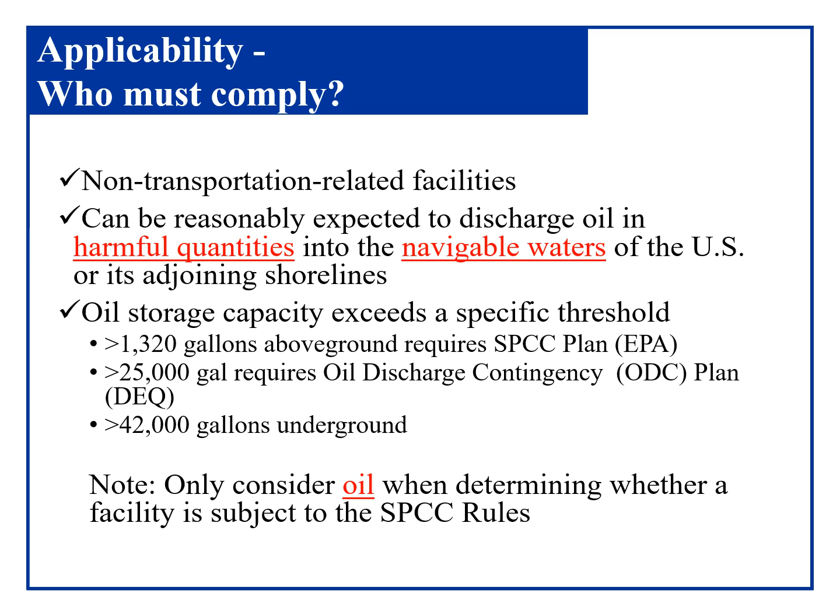You may be wondering what kinds of oil are covered under SPCC regulations. EPA defines oil as any kind of oil, including but not limited to petroleum, which includes oil mixed with wastes, vegetable and animal oils, seed oil, mineral oils, and others.

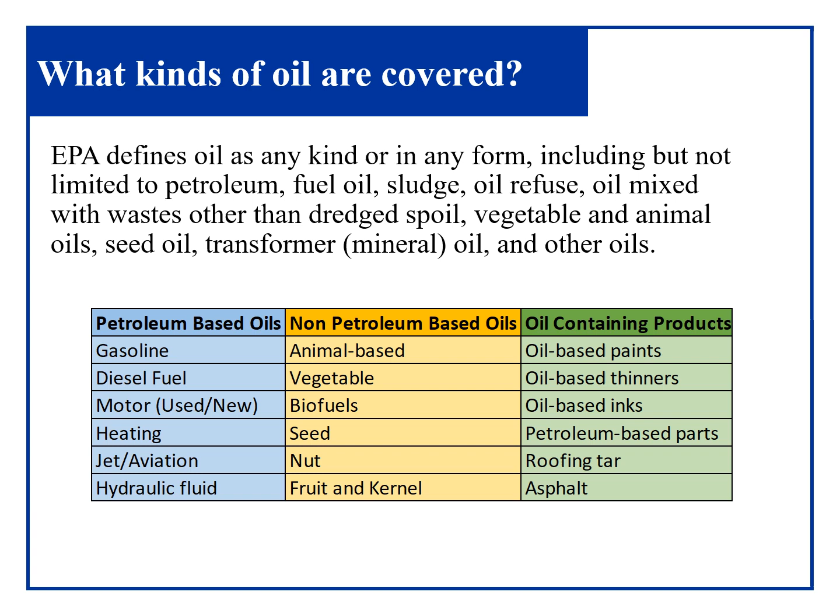As previously stated, in order to be subject to the SPCC rules, your facility must have the ability to discharge a harmful quantity of oil to a navigable water of the U.S. But what does EPA define as a harmful quantity? Unfortunately, it is not a quantitative number. EPA states that any amount of oil that would cause a sheen on the surface of the water or shoreline, or cause a sludge or emulsion to be deposited on the shoreline or beneath the surface, is considered a harmful quantity.

Navigable waters is defined by EPA as the waters of the United States or adjoining shorelines, including all surface waters like streams, wetlands, lakes, natural ponds, and rivers. At Central State Hospital, your flow pathway to a navigable water would be the following. Cattail Run and Rohoic Creek both drain to the Appomattox River. The Appomattox River then discharges to the James River, which eventually empties into the Chesapeake Bay. So Central State Hospital is within the Chesapeake Bay watershed.

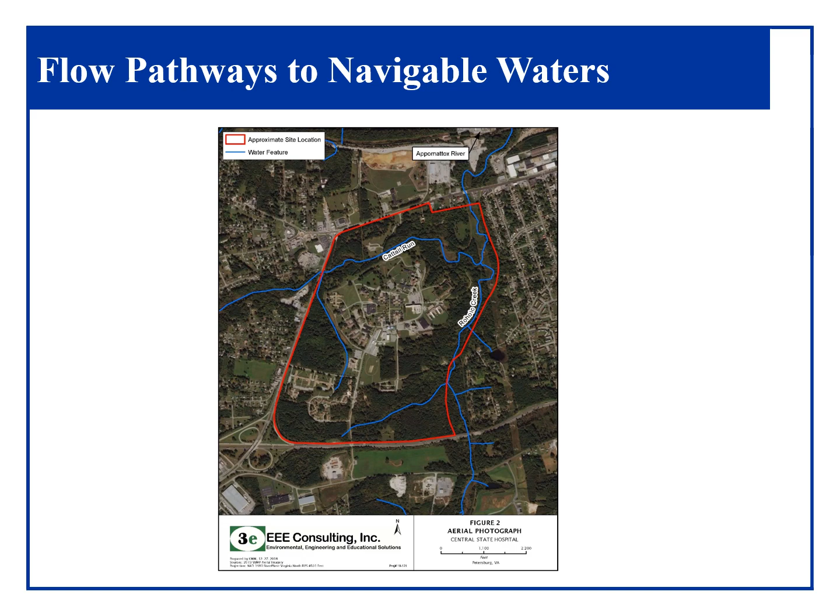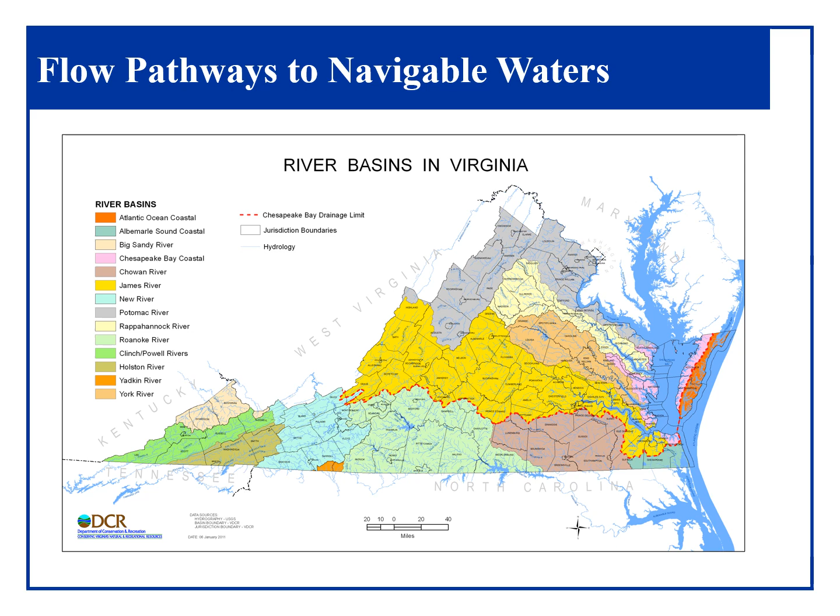This slide illustrates the major river basins in Virginia. As you can see, the James River Basin is in bright yellow in the center of the map. So why does your facility need an SPCC plan? Currently, Central State Hospital has approximately 20 above-ground storage tanks for fuel, most of which are for emergency generators. They range in size from 100 gallons all the way up to 80,000 gallons.

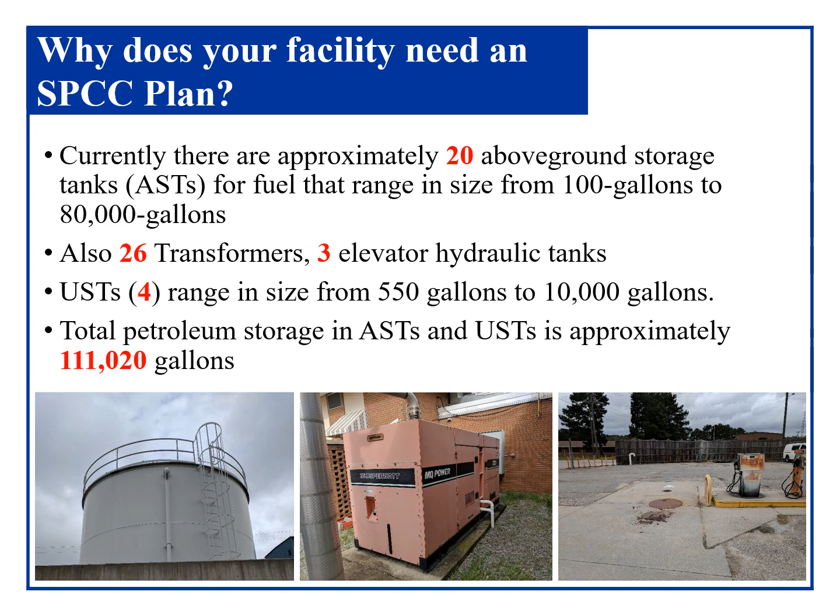Central State also has 26 transformers, 3 elevator hydraulic tanks, and 4 underground storage tanks ranging in size from 550 to 10,000 gallons. The total petroleum storage in above ground and underground tanks is approximately 111,000 gallons.

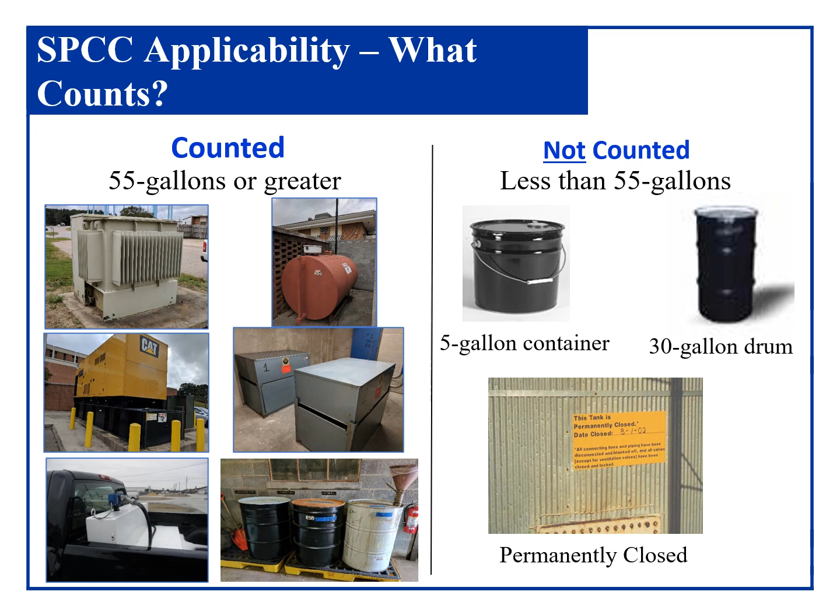SPCC regulations only cover containers that can hold 55 gallons or greater of oil. Things like transformers, portable truck tanks, 55-gallon drums, elevator hydraulic tanks, if any of these has the potential to hold 55 gallons or greater, regardless of how much oil is actually contained in the container at any given time. Which means if you have a 100-gallon tank, but you only ever put 20 gallons of oil in it, it still counts as a 100-gallon tank per SPCC regulations. SPCC regulations are not applicable to any containers less than 55 gallons or permanently closed containers.

As we just stated, the SPCC rules exempt any oil storage container that is permanently closed. In order to be considered permanently closed, all liquid and sludge must be removed from the container, all connecting lines and piping must be disconnected, all valves, except for the vents, must be closed and locked, and there must be a sign located in a conspicuous location stating that the tank is permanently closed with a date of closure. Closed tanks can be brought back into service at any time as long as they meet all SPCC requirements.

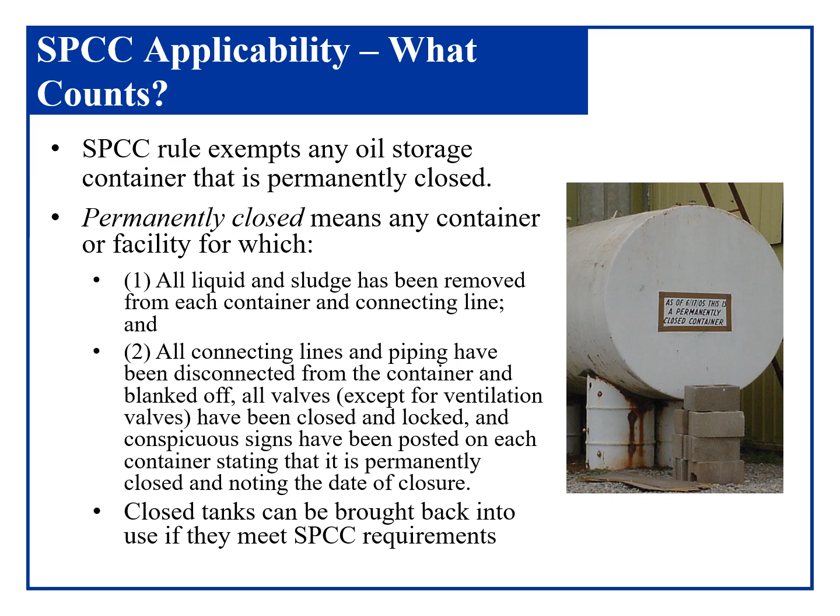It is important to note that your facility's SPCC plan must be reviewed and amended under the following situations. Whenever there is a change in facility design, construction, operation, or maintenance that would affect the facility's potential to discharge oil. If the facility gets a new tank, if you move a tank, or if there's major construction that would change the spill flow from a tank, all of those situations would require an amendment and a professional engineer stamp. If you do not have any changes, the plan must be at least reviewed every 5 years from the date of the original certification.

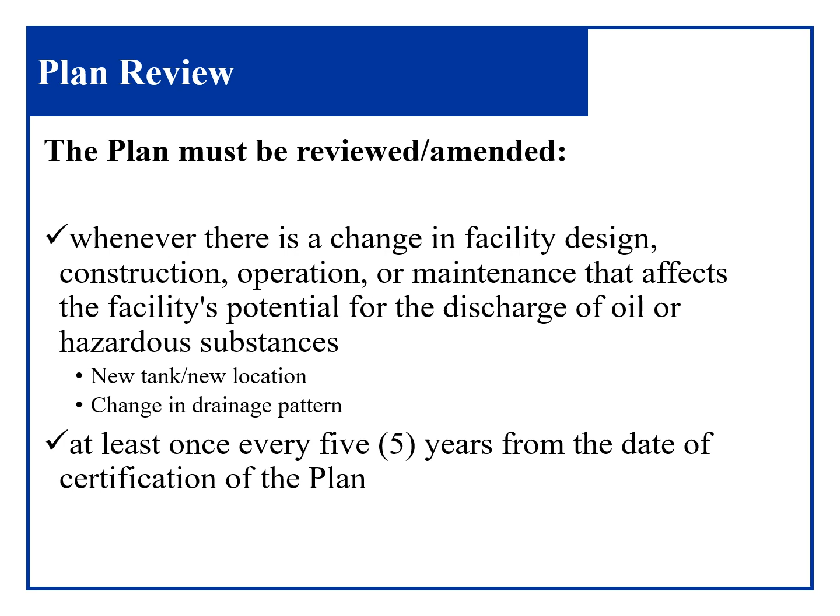Now we will take a short little quiz to go over some of the things we have discussed so far. What does SPCC stand for?

SPCC stands for Spill Prevention, Control, and Countermeasure. Are quart containers of oil covered under the SPCC plan? No. Only containers 55 gallons and over are regulated by SPCC. Who must be trained in SPCC requirements? All personnel who regularly handle oil products.

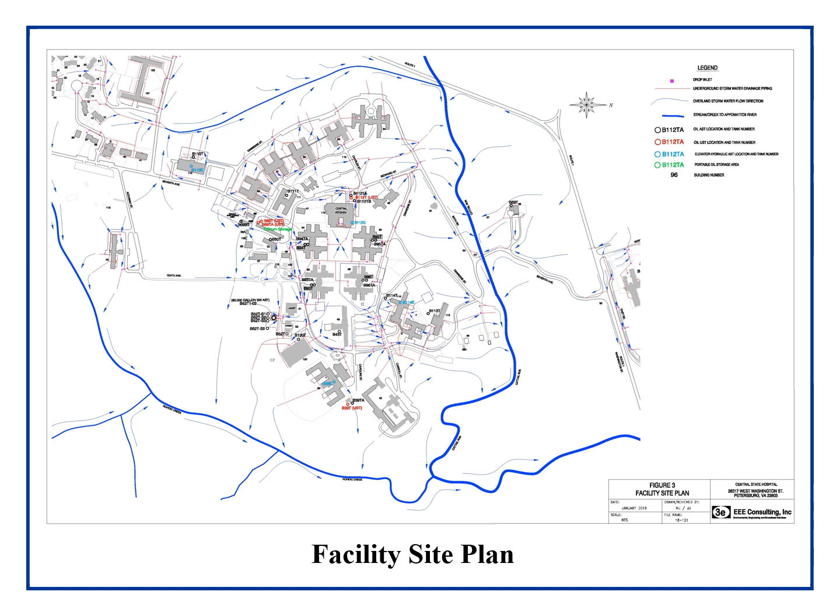Some of the important elements of the integrated contingency plan are security, discharge prevention, spill containment, flow pathways, countermeasures, response procedures, reporting requirements, and record keeping.

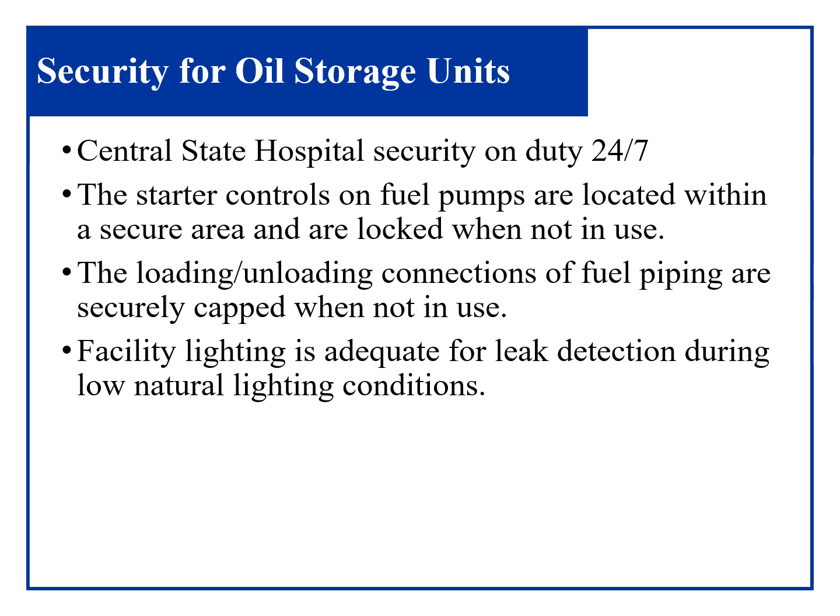Central State Hospital security is on duty 24 hours, 7 days a week. The starter controls on the fuel pumps are located within a secure area and should be locked when not in use. The loading and unloading connections of fuel piping should be securely capped when not in use. And facility lighting should be adequate for leak detection during low natural lighting conditions.

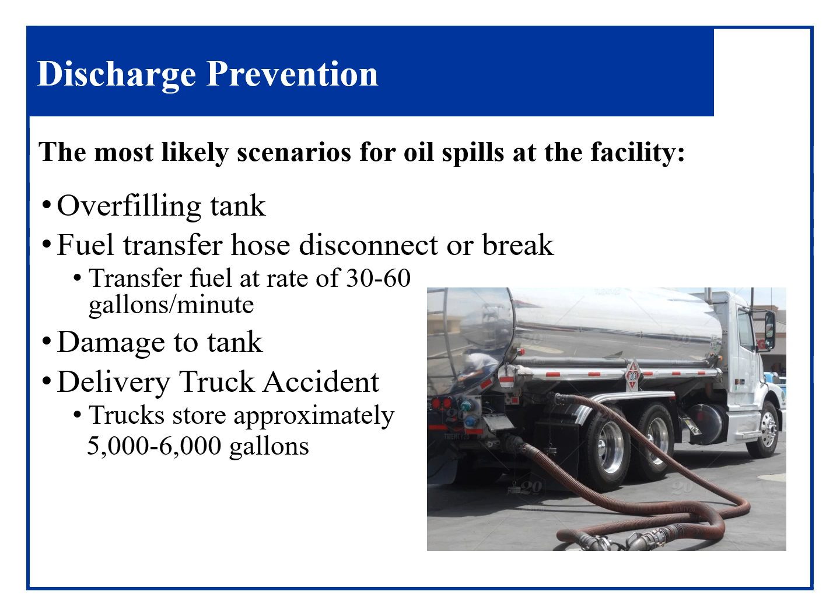Now we will take a few slides and discuss discharge prevention and how we can prevent spills at the facility. The most likely scenarios for oil spills are the following: overfilling the tank, fuel transfer hose disconnect or break, damage to the tank, or even a delivery truck accident.

How can we prevent overfilling a tank? It's very important to accompany the vendor during routine transfers, especially if the driver or contractor is new and has not delivered oil to the facility previously. Make sure you verify the volume of the product that the tank can accept before you offload.

Some facilities also have what's called an automatic tank gauge system. Other tanks may have an audible high-level alarm, which means an alarm will sound when they are filled over a certain amount. Tanks also have what's called an overfill protection valve, which will shut off flow to the tank when they are filled to 90 or 95% full.

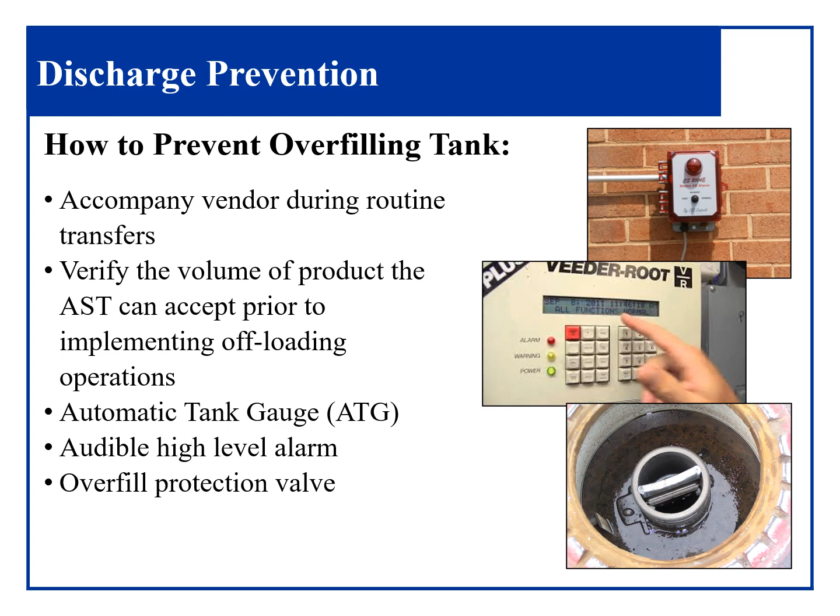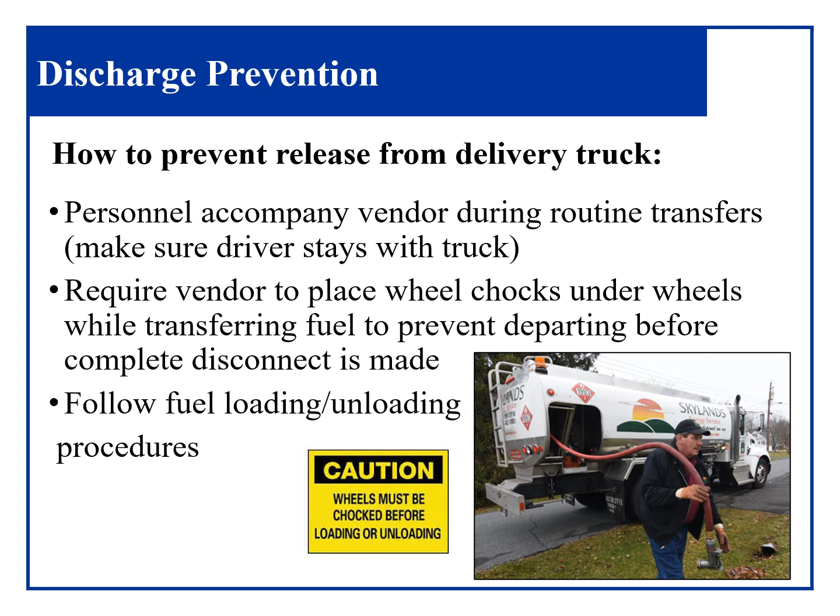How can we prevent release from the delivery truck itself? Again, make sure personnel accompany the vendor during routine transfers. Make sure the driver stays with the truck. Ensure that the vendor places wheel chocks under the wheels while transferring to prevent departing. And make sure you follow all fuel loading and unloading procedures.

How can we prevent release from the tank? It is very important that personnel inspect the tanks to ensure that they meet all SPCC and ODC requirements. Above ground storage tanks and containers must be inspected daily, weekly, monthly, and annually for signs of leakage and deterioration, and these records must be kept for 5 years.

Most above ground tanks at the facility are double walled, which means they have a primary storage tank surrounded by a secondary tank with an interstitial space that can capture any leaks from the primary tank. Underground storage tanks have an electronic leak detection system, which means any product in that interstitial space will trigger an alarm.

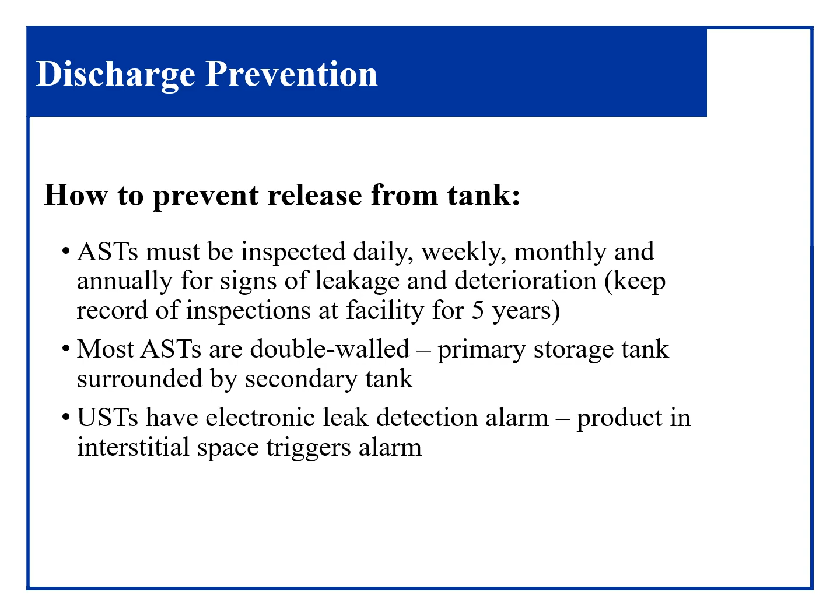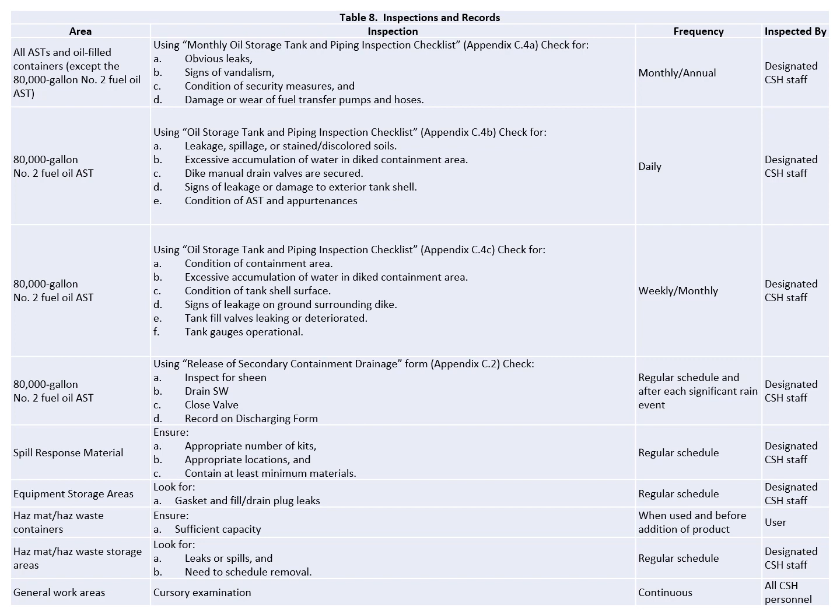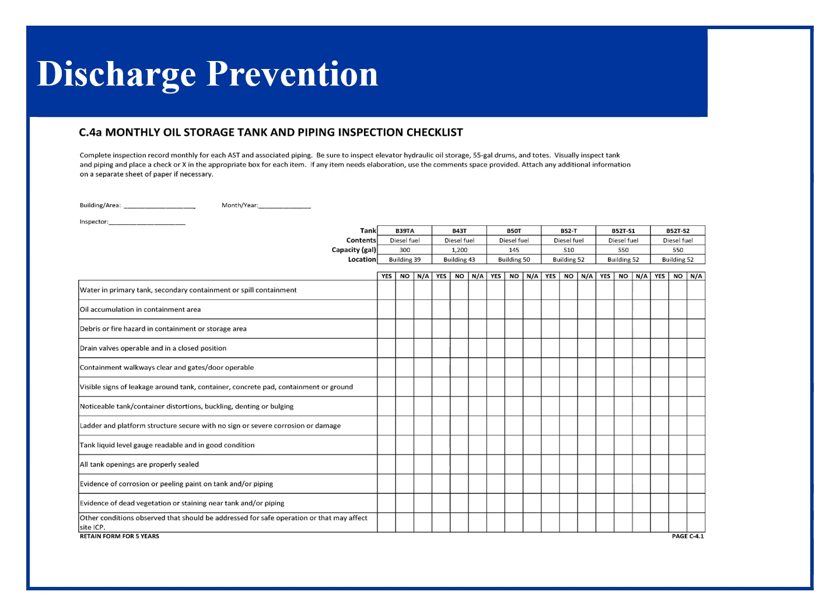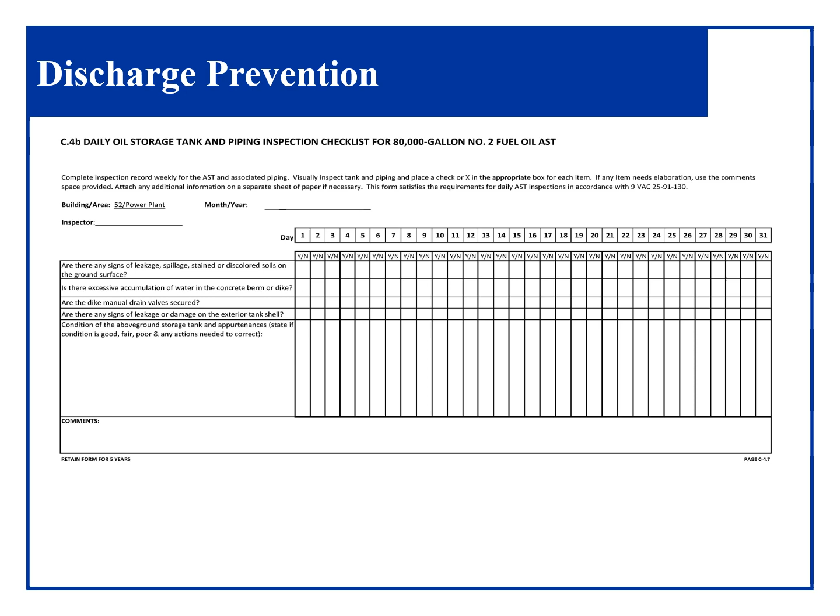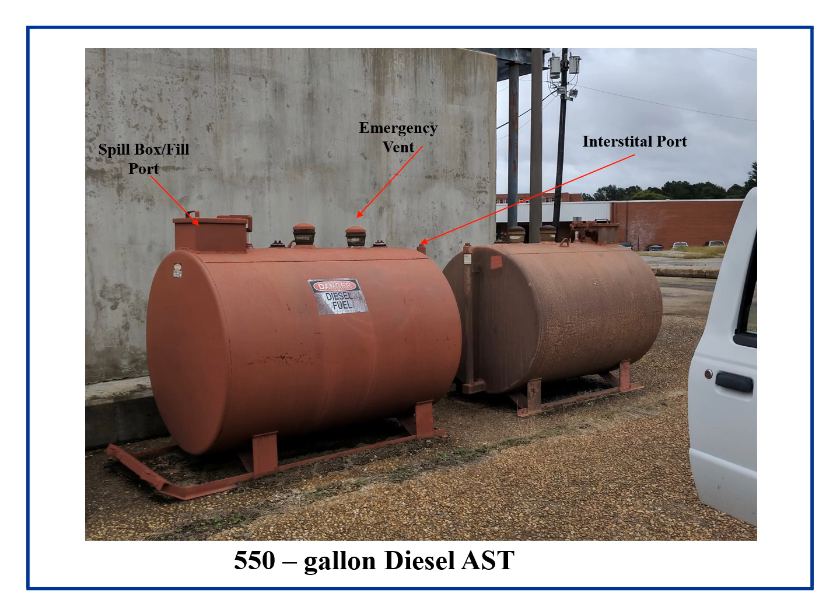You'll see the spill box, which is where they fill the tank. The box is there to catch any drips that may come from loading and unloading. You'll also see an emergency vent and an interstitial port. The interstitial port is where you can check to see if there's any water or fuel located in the secondary containment. These tanks are what we call skid mounted tanks because they can be moved from location to location fairly easily.

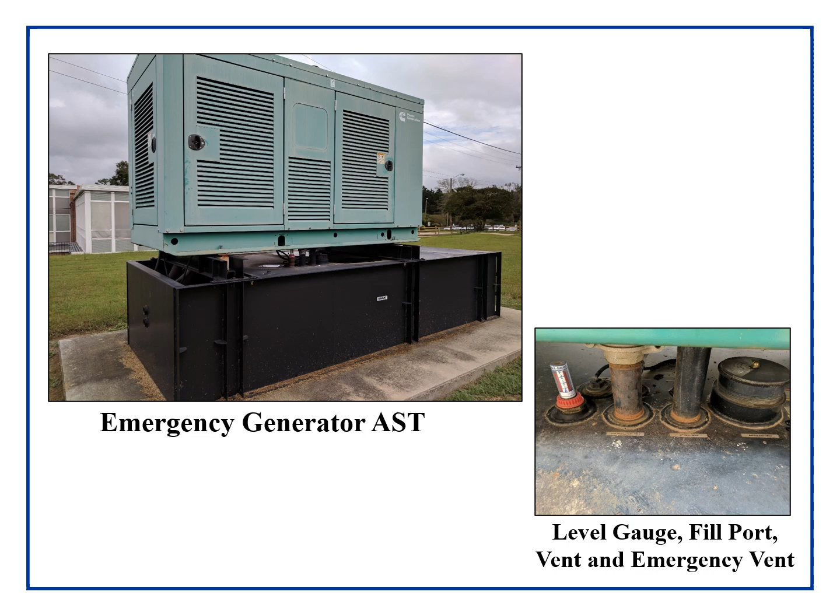On this slide, you will see an emergency generator, what we call a belly tank. It's a double wall tank located under the generator. You'll see it's on a concrete slab, which makes it easy to detect leaks and spills. Inside the generator, you will see the level gauge, fill port, and emergency vent. This is an example of a typical double-walled tank.

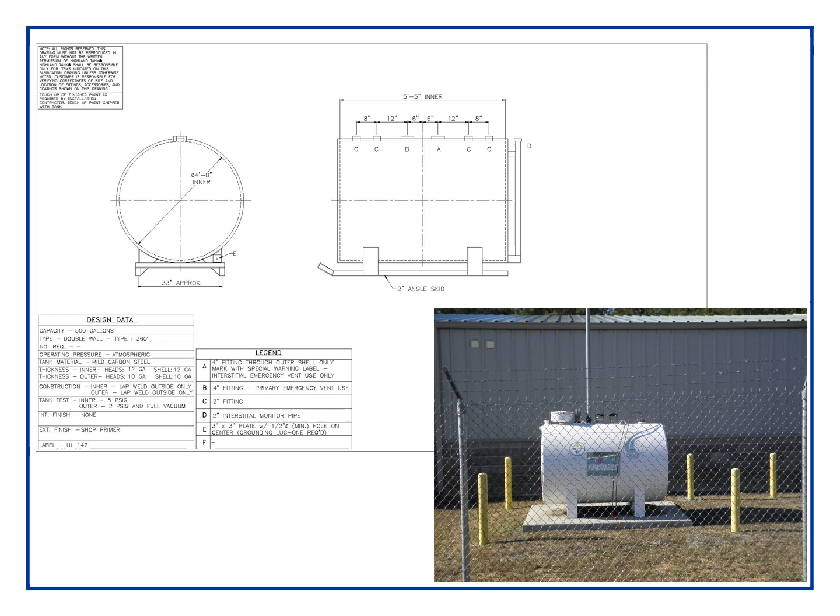Now we move on to spill containment. SPCC regulations talk about two different types of secondary containment. One is sized and one is general. Sized secondary containment is required for non-portable above-ground storage tanks. Secondary containment must be sized to contain the largest single container plus sufficient freeboard, which is typically about 110%.

For example, if you had a 100-gallon tank, you would have to ensure that your spill containment device would be able to hold 100 gallons plus 10%, so it would need to hold at least 110 gallons to meet SPCC requirements. Some examples of sized secondary containment at Central State include double-walled above-ground tanks, which we just saw some photos of,

concrete dikes. The 80,000-gallon number 2 fuel oil tank at Central State is surrounded by a large concrete dike, and also storage sheds with floor grates that are more than enough to contain 55 gallons plus 10%. But just note that all containers must have some sort of spill containment available.

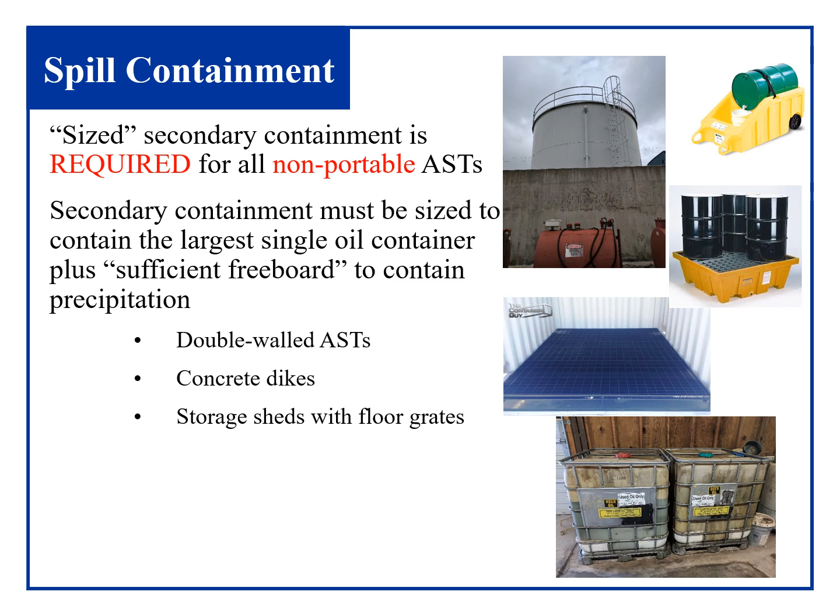General secondary containment is required for the following: portable fuel above ground storage tanks, such as the tanks that are in the back of a pickup truck for fueling equipment in the field, or they may be mounted on a trailer. Keep in mind that if these tanks are taken out of transportation mode and are stored on the ground for a significant amount of time, they would also require sized secondary containment.

Mobile refuelers and tankers, trucks that are actually transporting fuel to and from facilities, only require general secondary containment. Oil-filled equipment, such as the transformers and elevator hydraulic tanks located at Central State, only require general secondary containment. General secondary containment means that there's no size-specific volume requirement. It's typically based on spill size and not container size.

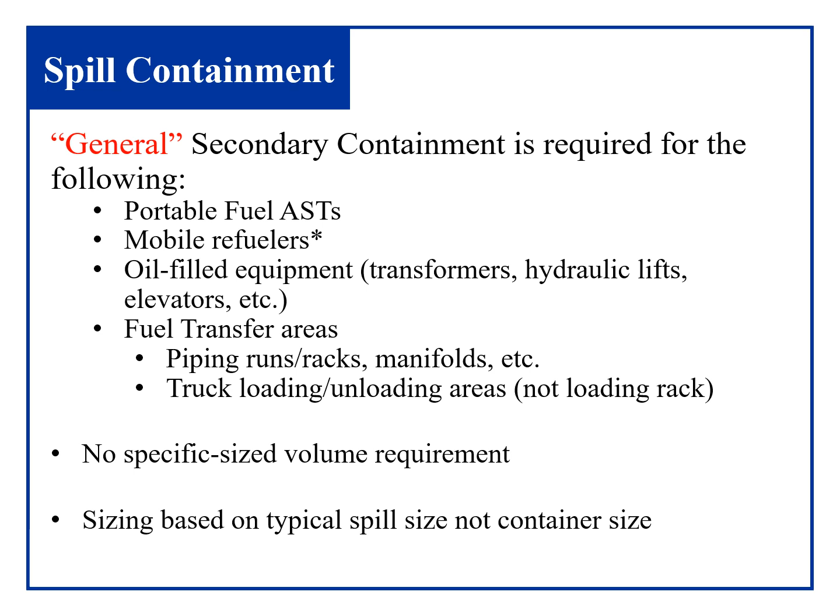Most facilities use spill kits to provide adequate general secondary containment. In order to provide general secondary containment at your facility, you must ensure that spill kits are available and accessible at oil storage locations, and especially for portable above-ground tanks. If you drive a truck with a portable tank in the back, you should ensure that you have some spill equipment inside the truck to be able to deal with leaks and spills that happen during transportation.

Spill equipment comes in all shapes and sizes. Absorbent pads come in a variety of colors. Gray pads are typically used for universal spills. They will pick up water and oil-based products. White pads are typically used in outdoor situations or anytime there's a storm involved. They only pick up oil products, so they are great for taking a sheen off of surface water. Pink pads are used for acid spill cleanups, so they are great if your facility stores batteries or any other acid products.

Absorbent booms, socks, and pillows are also other options. They are great to have on hand. They are flexible and can be used to create a barrier around a spill to contain the spill. They can also be used to protect culverts and drop inlets.

And Oil-Dri, which a lot of people refer to as kitty litter, which is easily accessible from just about any auto parts store, Lowe's, Home Depot. Oil-Dri is one of the only spill equipment that can actually be used over and over. You can reuse Oil-Dri until it is saturated, at which point it needs to be disposed of properly. Keep in mind that once spill equipment is used to clean up a spill, it must be disposed of properly and not placed in regular trash.

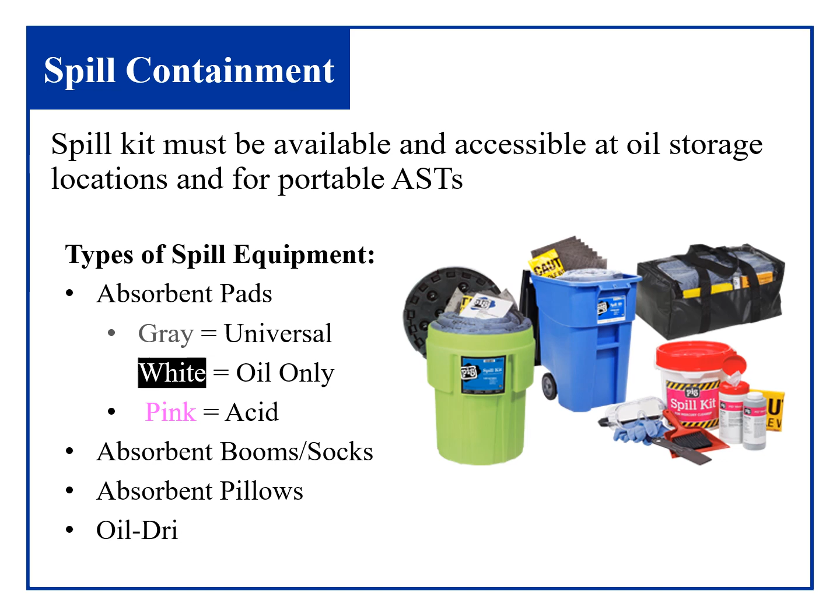Okay, so now we've covered the difference between sized and general secondary containment. Remember to check before you drain any secondary containment structure. This is especially important at Central State. There is a large concrete dike surrounding the 80,000-gallon tank, which must be drained regularly to prevent stormwater accumulation and to ensure that proper secondary containment is maintained.

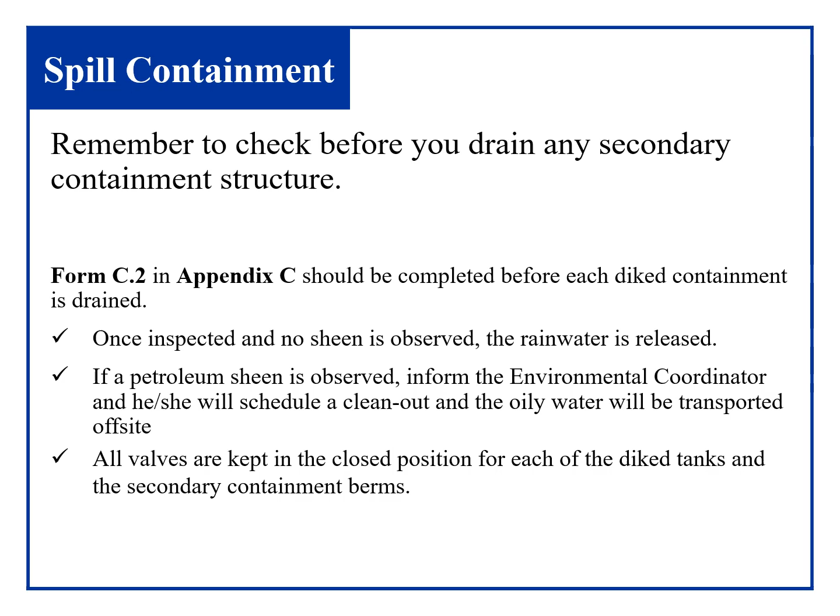You must fill out the form in Appendix C before each containment is drained. You must inspect the water and note that no sheen is observed before you release the rainwater. If you do see a petroleum sheen, you need to inform the environmental coordinator, which in this case would be the physical plant director, and he or she will schedule a clean out, and the oily water will need to be transported off-site by a certified contractor. Remember to keep all valves in the closed position at all times unless you are emptying the containment.

So we've discussed spill prevention, control, and now we will discuss countermeasures. Spill kits and absorbent material on site serve as control and also serve as a countermeasure. Also ensure that you have incidental and major spill response procedures posted in conspicuous places so that if there is a spill, employees understand the procedures and who to call in case of a spill. Also, if your facility happens to have earth-moving vehicles, you can use those in some cases to create an earthen berm or dam if needed.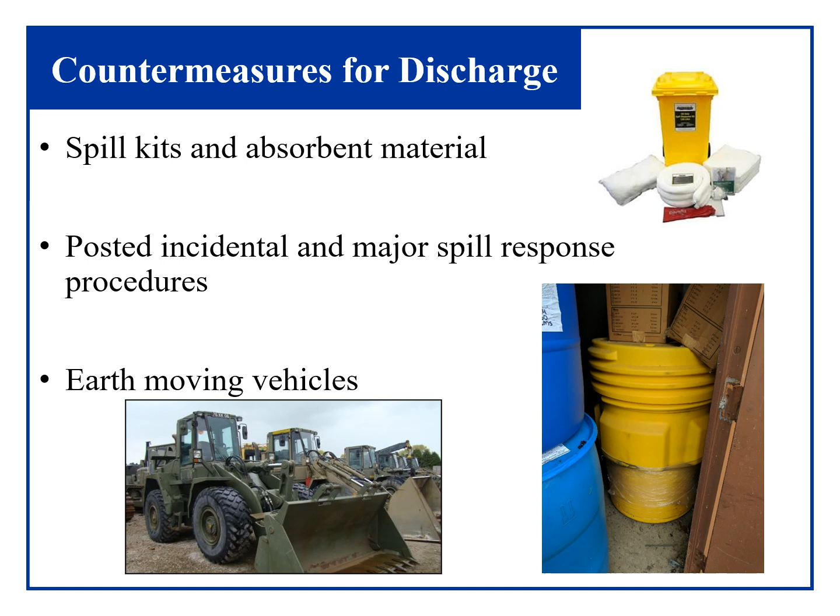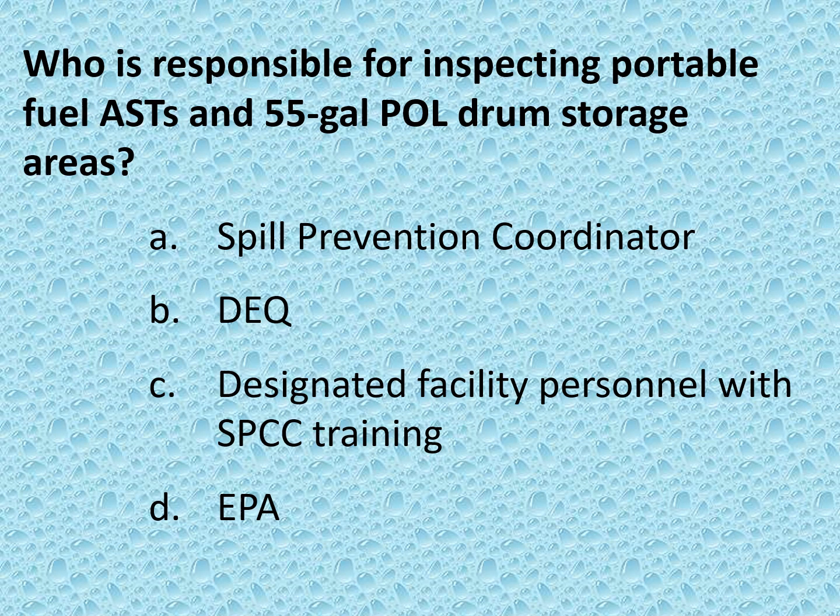Okay, now it's time for quiz number 2. Question number 1. Who is responsible for inspecting portable fuel ASTs and 55-gallon drum storage areas? A, the Spill Prevention Coordinator. B, Virginia DEQ. C, designated facility personnel with SPCC training, or D, EPA. The correct answer is C, designated facility personnel with SPCC training. Please make sure that anyone filling out inspection checklists has the proper SPCC training.

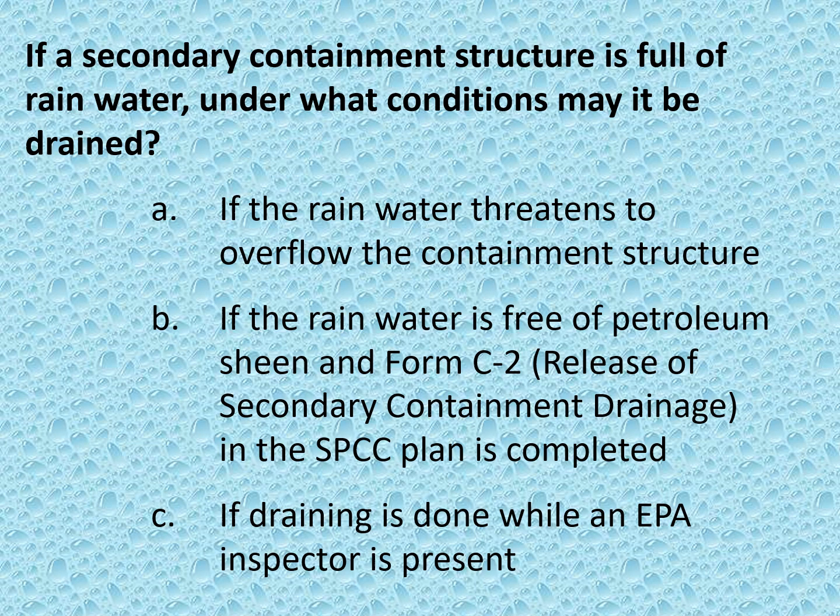Question number 2. If a secondary containment structure is full of rainwater, under what conditions may it be drained? A, if the rainwater threatens to overflow the containment structure. B, if the rainwater is free of petroleum and Form C-2 is completed. C, if draining is done while an EPA inspector is present. The correct answer is B, if the rainwater is free of petroleum sheen and Form C2 in the SPCC plan is completed, you may drain the secondary containment structure.

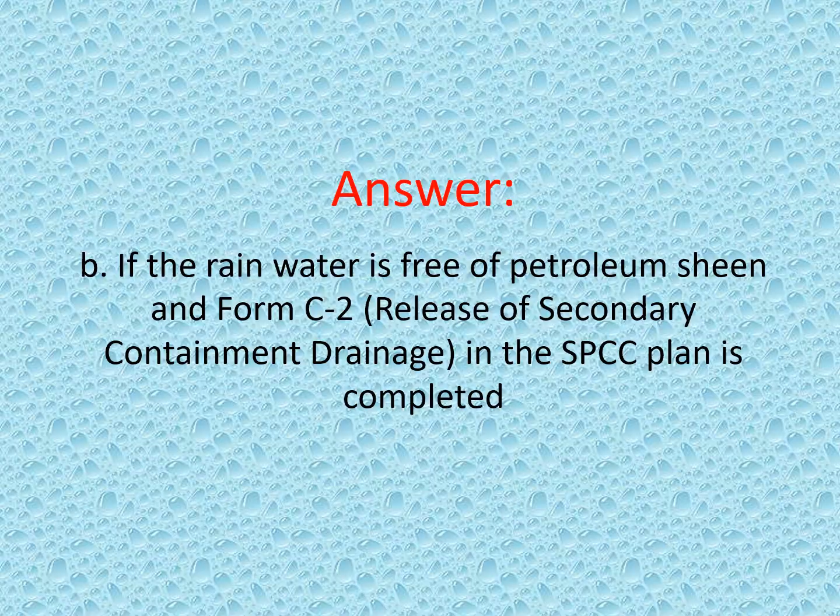As discussed, one of the countermeasures under SPCC is to ensure the facility has oil spill response procedures. So we will take a few minutes to go over proper procedure. If you discover a spill, please make sure that you exercise personal safety first. Secure the area if you can, restrict access, and remove any ignition sources, especially if you're dealing with a flammable material. Remember that when we talk about spill response here, we are only talking about oil products. We are not talking about other hazardous substances and materials that you may not be properly trained to handle.

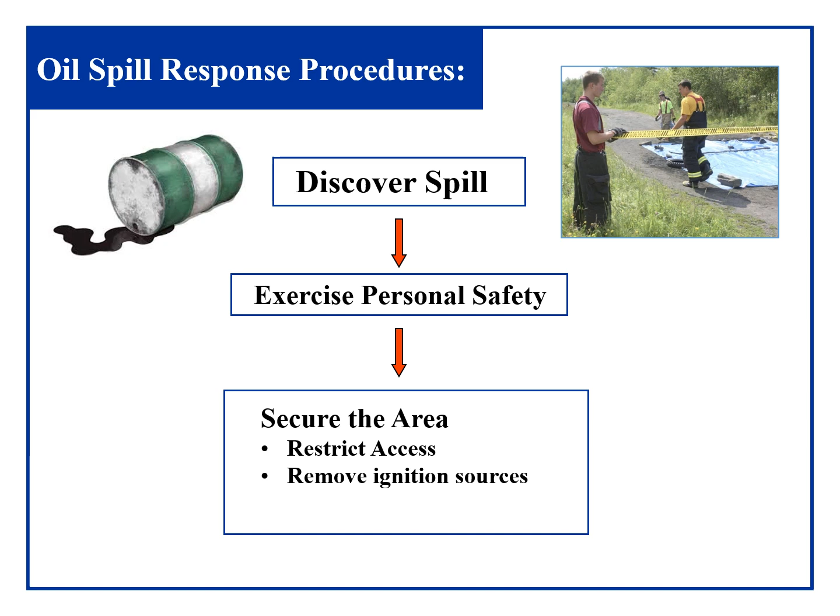Stop the source if you can without endangering personal safety. So for example, if you walk into the shop and a 55-gallon drum of hydraulic oil has been tipped over, you can upright that drum to stop the active leak. But if it's an oil tanker on site delivering fuel and there's a catastrophic failure, a hole in the side of the tanker, that's not something you're going to be able to stop without endangering personal safety. In that case, you would walk away, notify your supervisor, or contact response personnel.

If you do have to call response personnel from the local hazmat team or fire department, make sure that somebody meets the response personnel at a safe distance from the spill and directs them to the spill. The supervisor and the response team will then coordinate response and cleanup efforts. Properly trained personnel will contain and control the spill, and then properly trained personnel will clean up spilled material after. You will have to contact the spill prevention coordinator for proper disposal procedures. The spill prevention coordinator will be the only one to complete appropriate notification forms and reports to state and federal regulators if applicable.

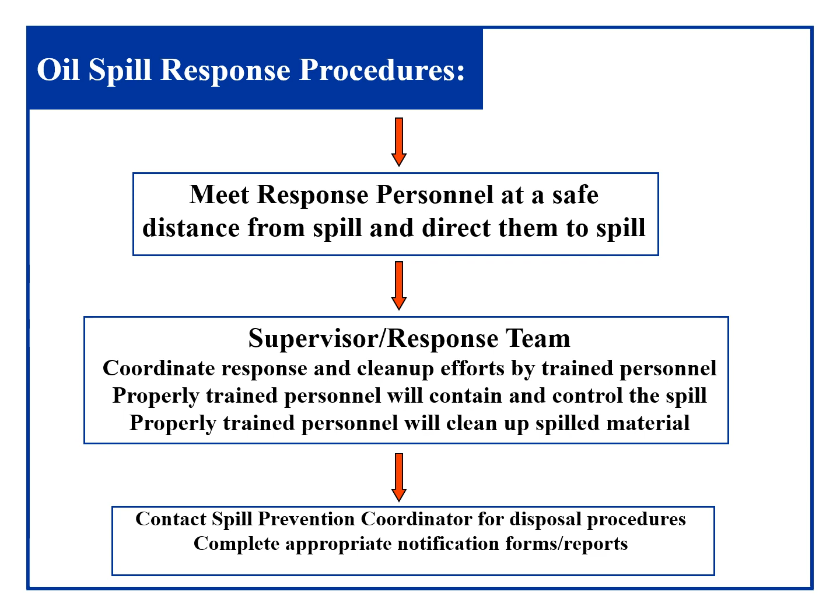When you first discover a spill, make sure you survey the area. What is the most immediate hazard? Are you in imminent danger? If the answer to that is yes, then you walk away and you call for response personnel. Is the spill headed for a drain or for coworkers? Can you act safely to stop the leak? If so, then proceed.

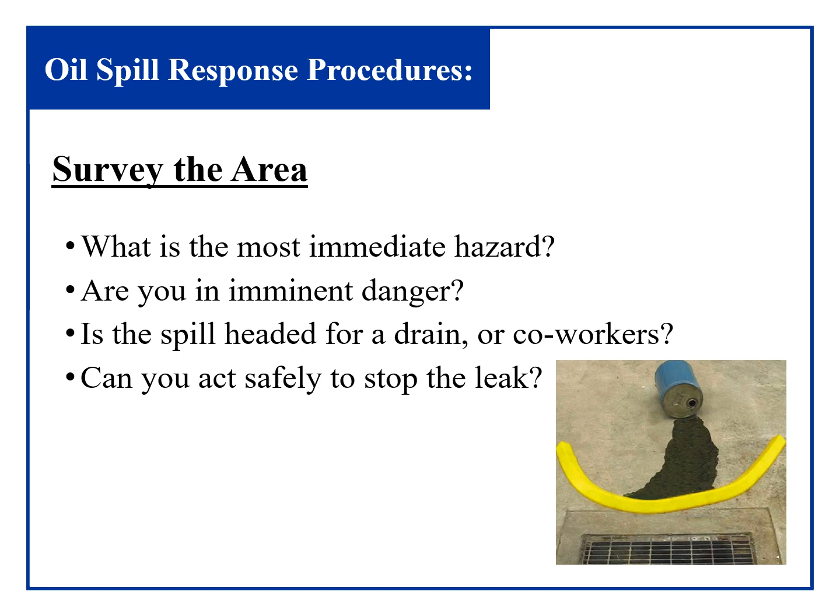Safety data sheets, formerly known as MSDS, now only referred to as SDS. It is important that you keep SDS for the chemicals and substances that you use on a daily basis accessible and up to date. Make sure you review SDS for safety precautions, for proper handling of chemicals, necessary PPE, disposal procedures, and cleanup procedures.

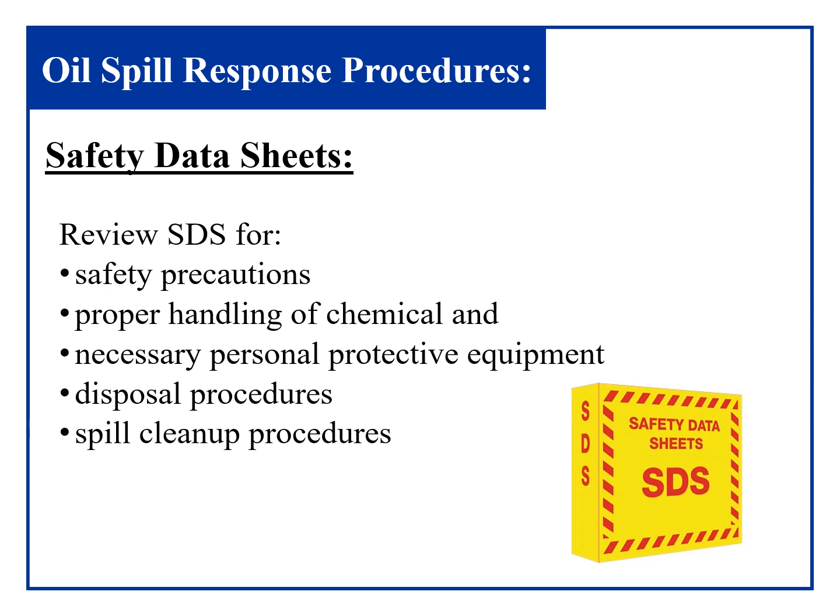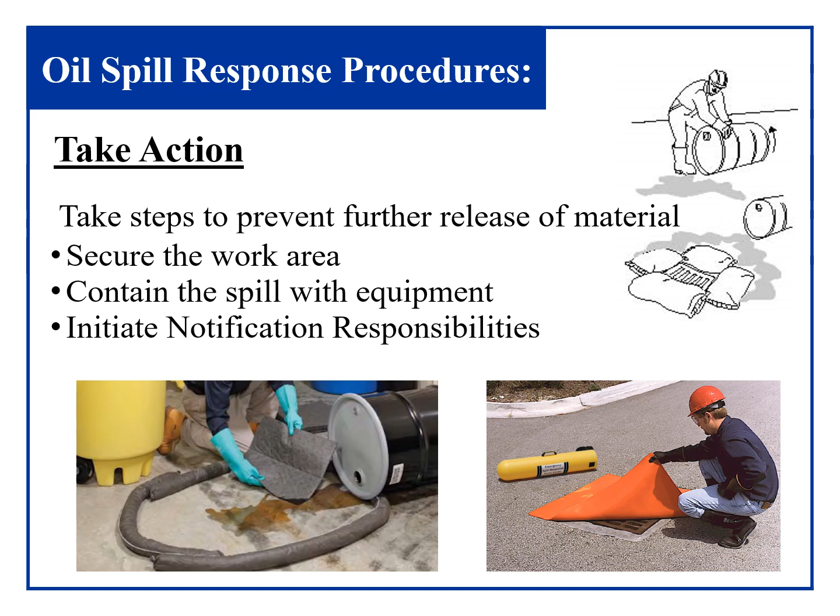You also want to go ahead and initiate notification responsibilities, notify your supervisor or environmental personnel as appropriate. Notification responsibilities. Whoever discovers the spill should contact their supervisor, or if that's not possible, go ahead and contact the spill prevention coordinator, which in this case is your physical plant director. If you need help from a hazmat response team, you will need to contact Dinwiddie Fire Department if necessary.

Just so you know, there is no threshold for calling the hazmat team. If you have a spill that you do not feel comfortable handling or you cannot handle with the spill equipment you have on site, please feel free to call the fire department. That is what they are there for. Do note that the fire department and hazmat response team, their job is to contain and control. Their job is not to clean up. So they will come on site, they will contain and control the spill, and then the facility will have to reach out to a contractor to remove the material and properly dispose of any impacted soil or other products.

The spill prevention coordinator will make decisions regarding spill cleanup, will ensure that all appropriate regulatory agencies are notified if necessary, will complete an oil spill report, and ensure that that report is kept for 5 years with the integrated contingency plan.

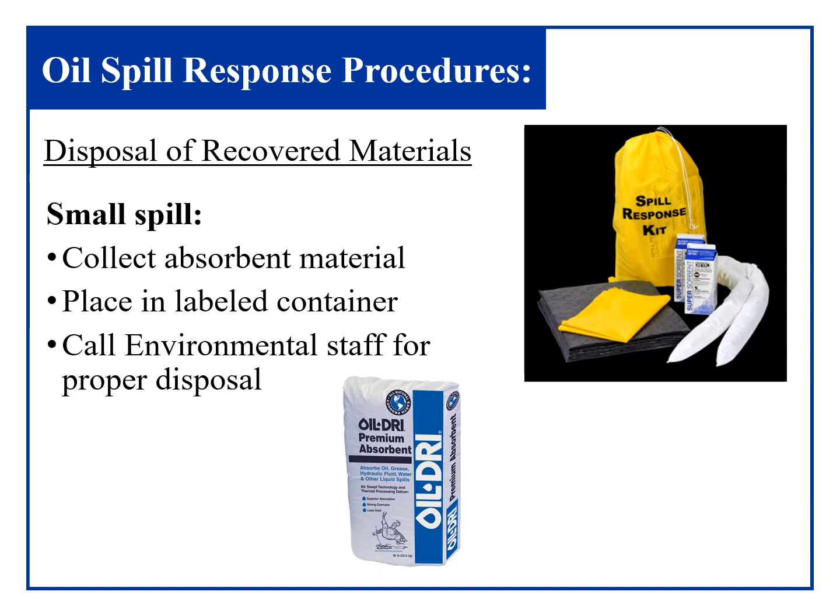As we had mentioned before when we were talking about spill equipment, make sure that if you clean up a small spill with absorbent material, whether it's Oil-Dri or pads, you place that material in a labeled container and call environmental staff for proper disposal. Do not put that in the regular trash. If you have a large spill that a contractor has to come in and either has to dig up soil or gravel or any impacted materials, the contractor will then be responsible for loading and disposing of that material according to applicable regulations.

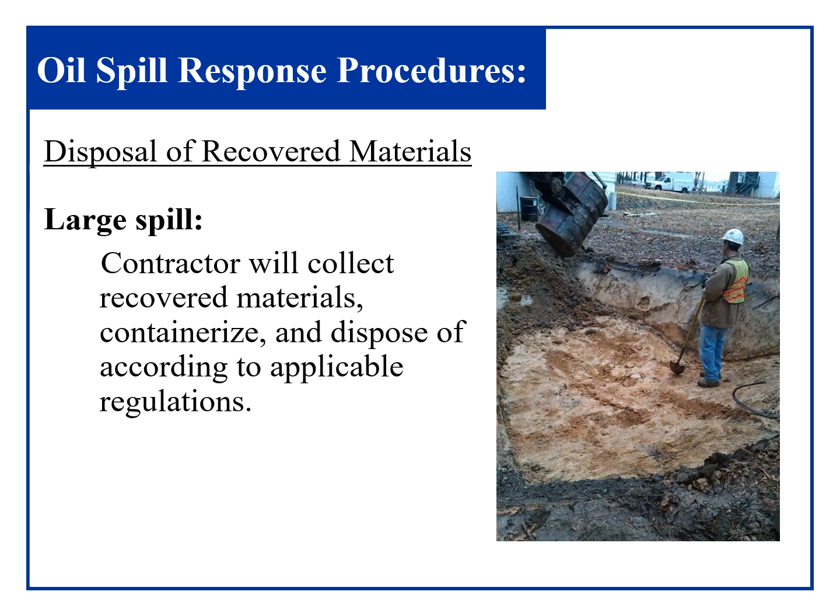The following spills must also be reported to Virginia Department of Environmental Quality and the National Response Center. But keep in mind, only the spill prevention coordinator for the facility will make these notifications. Any spill greater than 25 gallons to the environment must be reported to the state and federal level. To the environment means outdoors. If you have a 30-gallon spill in your shop and it never leaves the shop floor, none of it goes outside, that spill is not reportable to state and federal.

Any spill to surface water or stormwater system. Note, there is not a quantity threshold, because if you recall at the beginning of our training session, we said that EPA defines a harmful quantity of oil as any amount of oil that would cause a sheen on a surface water. So any spill to surface water or stormwater system must be reported. Remember that all spills, regardless of size, must be cleaned up and disposed of properly.

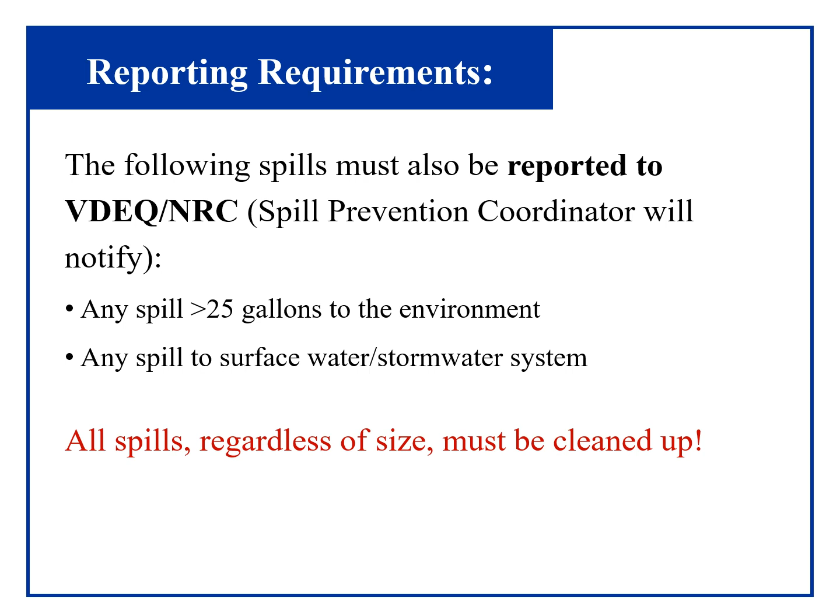And remember, all releases, whether they are reportable to state or federal or non-reportable, should be documented, and that documentation must be maintained on file at the facility for 5 years.

Last quiz of the day. If I discover a spill, I need to contact 911, DEQ, EPA, and the National Response Center. That is false. If you discover a spill, you are only supposed to contact your supervisor and/or the spill prevention coordinator. The spill prevention coordinator is the only one who should be contacting and notifying state and federal agencies.

What is the name of the primary spill emergency contact for Central State Hospital? The answer is Andrew Conti, the Director of Physical Plant Services and also the facility spill coordinator.